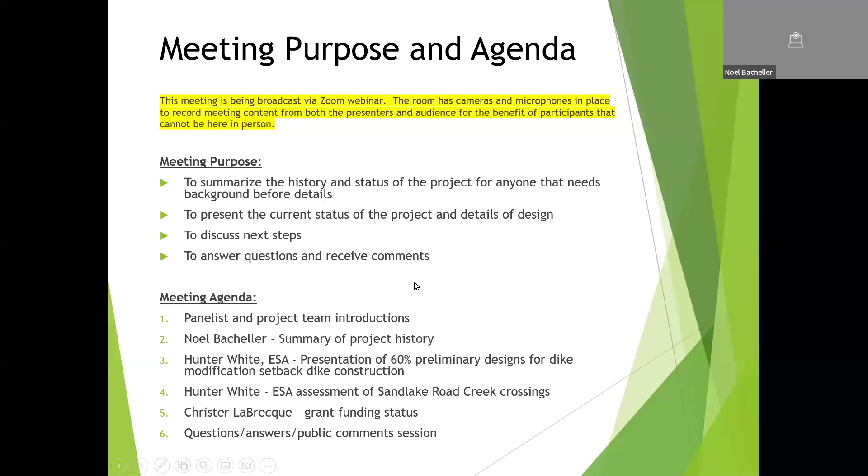Okay. All right, sorry everyone, mandatory technical difficulties, I never get through one of these meetings without them. I don't see any volume control. Oh wait, I know, it's over here on the wall. All microphones are at maximum now, hopefully that works.

Okay, to launch into the history and background now, I'll set the stage with the location. I'm sure everyone here in the room is familiar with the property, and sorry to go over this background again for those who've been to many of our past meetings, but there may be people on the webinar who haven't heard the backstory. The red boundary on the map is the park boundary. This black line is the 1930s era existing dike, Beltz Dike, which has a tide gate right here.

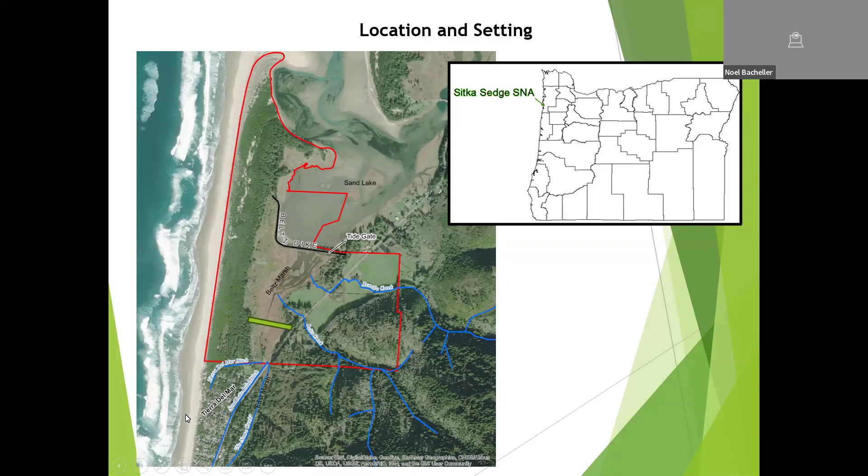There are three main streams that enter the marsh behind that dike. Reneke Creek is the northernmost, then we have Beltz Creek, and then No Name Creek—that's not its real name, but that's what we've been calling it for this project. No Name Creek flows through what we're calling East Marsh, again not a proper name. Sand Lake Road Ditch is here, and the Tierra del Mar Ditch. Tierra del Mar, the community, is here just to the south of the state park boundary.

And the purpose and need for this project: as many of you are aware, this is a very old dike. It's from the 1930s, not very tall, and has one undersized tide gate, a 4x4 box culvert.

The flap on that tide gate has no planks on it anymore, so water blasts through this thing unimpeded. The water velocity running through there is like a fire hose, just really high velocity, causing a lot of eddying and erosion.

The current box culvert, being only a 4x4 opening to drain an area of more than 70 acres of marsh habitat, is dramatically undersized. I like to describe this as something like an hourglass. This very small hole through the dike is very resistant to flow in either direction, so it takes a long time for water to come in, but it also takes a very long time for that water to go back out again. That'll be demonstrated in a video simulation here a couple slides ahead.

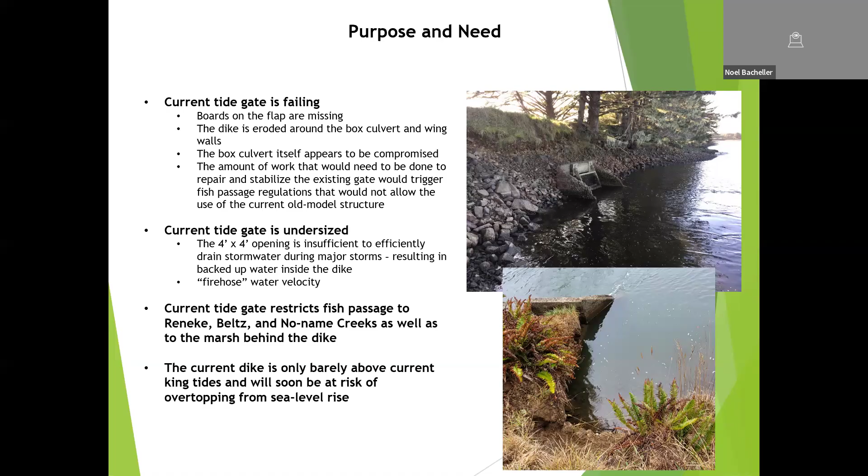So what have we done so far, and what's the timeline? This project has been investigated since about September of 2014, when State Parks acquired this property, and there have been many twists and turns. We did a bunch of analyses of biology, recreation, cultural resources, aesthetic resources, recreational usage, et cetera, up until about 2017 with the publication of the master plan. Then we really understood that this dike situation was a really big thing.

We had to do a lot more analysis of hydrology, surface water and groundwater, and embarked on several years of very detailed hydrological analysis, including the park and Tierra del Mar to the south. In 2019, when those studies were completed, a tech team convened to review the alternatives on the table and compare and contrast the pros and cons of each.

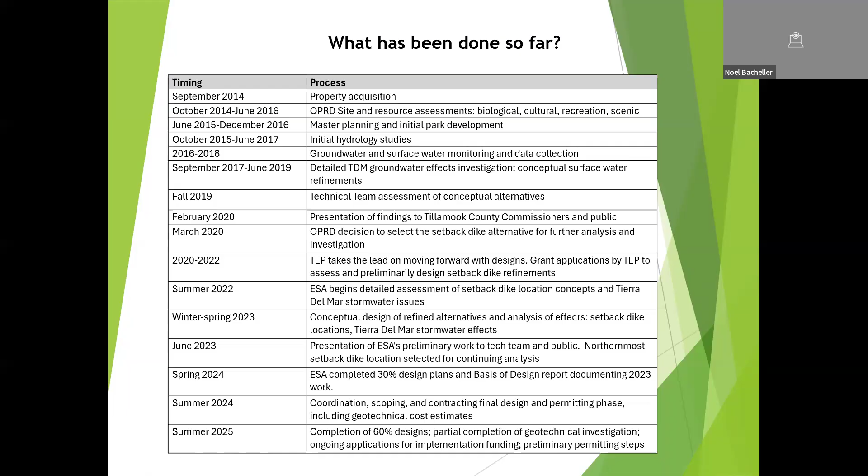In 2020, this was presented to Tillamook County Commissioners, the State Parks Commission, and State Parks leadership, and eventually we landed on a setback dike as the preferred alternative—the one that seemed to hit the majority of the goals for the property and for stewardship of both our relationship with neighbors and the property as a whole. We joined up with Tillamook Estuaries Partnership in 2020, and then ESA began working on the analysis of the setback dike in 2022, culminating in where we are today at 60% design.

Over the period of review, we've had at least 20 stakeholder meetings—it's getting hard to track the number over all these years, but maybe 23, 24 meetings. We've had news releases, and we have a website that holds all the archives for this project, including the hydrological studies from 2017, 2018, 2019, tech team results, et cetera.

We have an email list to which I'm sure many or most of you have subscribed. And we have had meetings with adjacent landowners and ongoing communication and collaboration with the Tierra del Mar Community Association and interested landowners. So what are the alternatives that we've assessed over the years?

Dike breach is something that's also a bookend. It doesn't meet our project goals, but it's there as a reference condition.

The two action alternatives that have really been analyzed over the years are replacing the existing tide gate with a modern muted tidal regulator system, and we analyzed different closure settings. I'll get into that in a future slide.

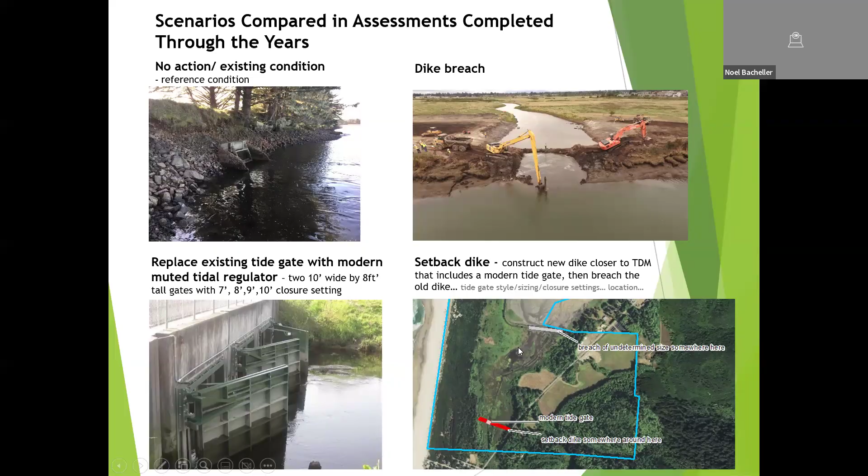This slide is just really to demonstrate that we went through a lot of analysis over the years to show what the effects would be with all of these different alternatives. So in the upper left here, we see the existing condition. This is what we see now.

And then we tested a 7-foot tide gate closure in a modern tide gate in the existing dike, 8 foot, 9 foot, 10 foot. We looked at the reference condition, which you could call a breach, or maybe before the 1930s. This would be the historic condition that existed here before the dike was ever built. And then the setback dike, which is our preferred and current alternative that we're pursuing.

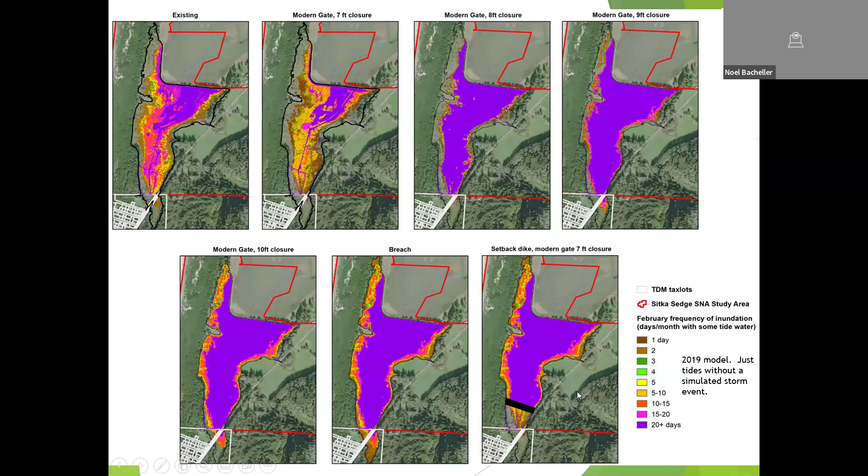That's the alternative that is the least impactful to, and beneficial for, Tierra del Mar.

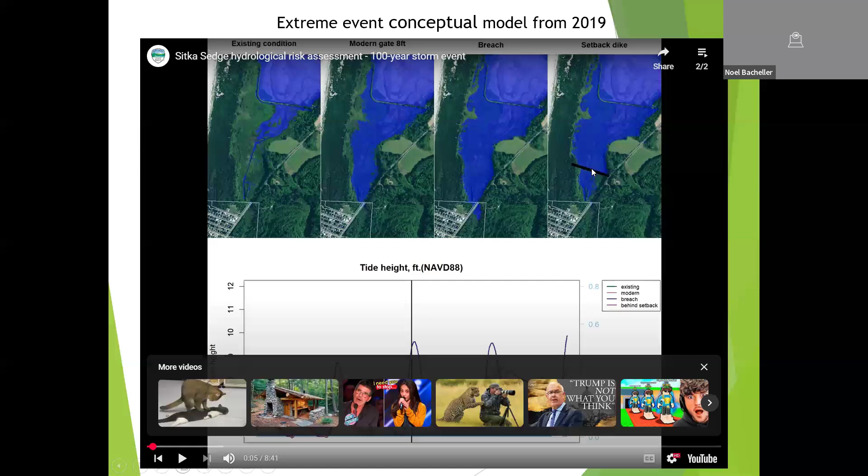The graph down at the bottom shows the height of surface water under each of these areas. The existing dike is the green line, the breach is the tallest one, the modern tide gate in the existing dike is an orange color, and the setback dike is more of a brown color. The blue is a rainfall event, and these tides are about 10 feet - big tides, king tides.

So what we do here is we just allow this to run. The line through the middle of the video is showing the point in time represented in the snapshots above. The point to notice here is that the existing condition drains out very slowly compared to all of the other alternatives.

This video takes a while, so I'm going to move it forward into this significant storm event - not a 100-year event, but a significant one. You'll see the tides come in under all scenarios, and under the existing condition with this amount of rainfall, it essentially never goes out. It stays in for tide cycle after tide cycle, while the other alternatives all drain out really quickly.

Now I'll move it ahead to a real gully washer storm - this is a 100-year storm event.

Off the charts rainfall with the highest tide we've ever observed, about a 12-foot tide. What we see here is what you'd expect from the previous segment with a lesser tide: the tide comes in and stays for days under the existing condition, whereas it drains out quickly under the other alternatives.

Of note here, the setback dike outperforms the modern tide gate with an 8-foot closure setting. It drains out more quickly because not as much tide water is stored or allowed to get in close to Tierra del Mar. These private properties, these tax lots, receive sustained inundation under the existing condition, but they're all drained out efficiently under either the modern tide gate scenario or the setback dike scenario. The setback dike performs the best.

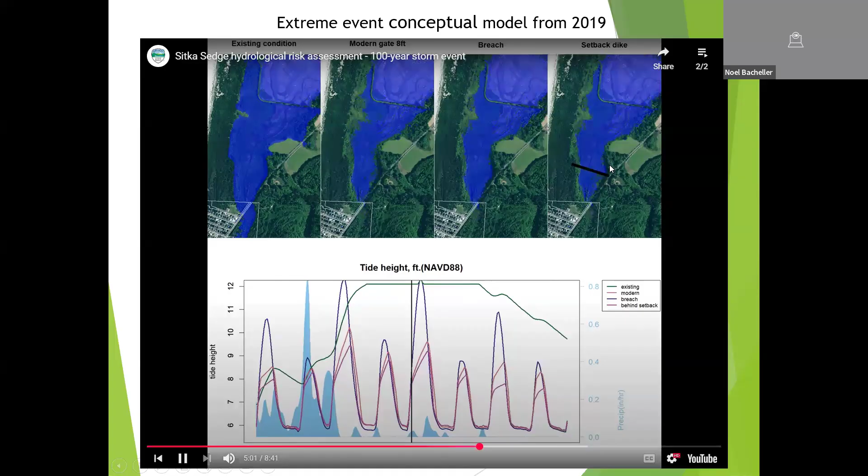So OPRD, the Oregon Parks and Recreation Department, put together some sideboards - five guiding principles for selecting an alternative. The first is that the design should result in virtually no increase in tidewater, stormwater, or elevated groundwater on private properties in Tierra del Mar.

Number two is the design should result in meaningful improvements to estuary and fish habitats in the area inside the existing dike. The design should restore fish passage to the mouths of Reneke and Beltz Creeks.

Recreation access should continue. We still want people to get into the marsh, to get across the marsh, and be able to get out to the beach and out to the dunes and experience the park.

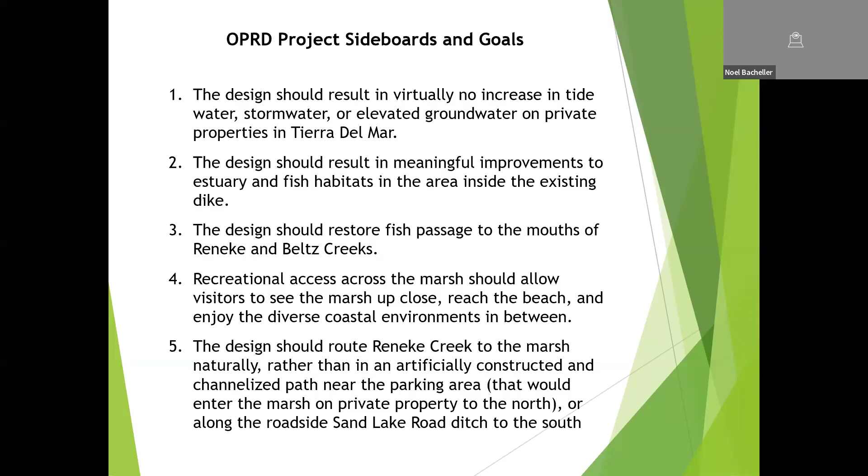And the design should route Reneke Creek to the marsh in a natural channel rather than, like right now, running in a roadside ditch. So we want a natural channel for Reneke Creek that has proper fish passage and fish habitat.

So, pros and cons for each alternative that led to the eventual decision. The no action alternative has no pros - it's the worst case scenario, so I'm not even going to talk about that one. It doesn't meet OPRD's stated goals at all. The dike breach scenario also doesn't meet OPRD's stated goals because it increases tide water on private properties.

It does have the highest estuarine restoration value - more estuarine restoration, more fish passage, and more fish habitat there, but the cons outweigh the pros, so it's out. The modern tide gates in the existing dike are sort of middle of the road. It has some good effects on habitat, but not as good as the setback dike, and it's also not resilient to sea level rise.

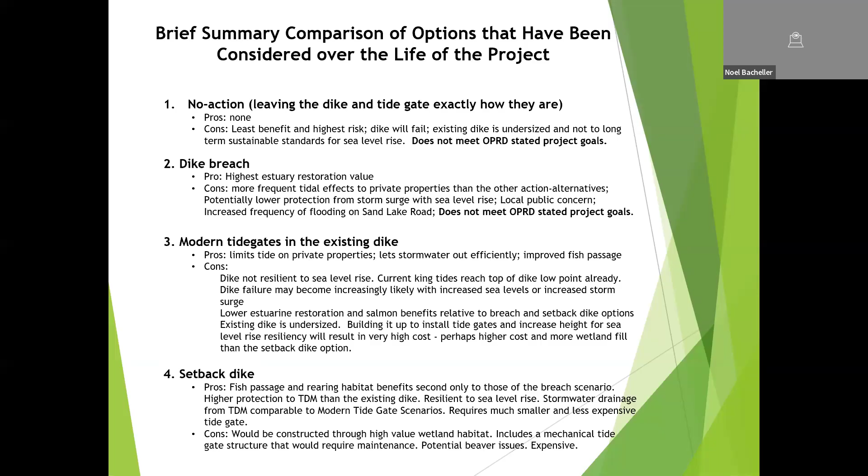The existing dike, if you slap a new tide gate in there, yeah, it'll do what it's meant to do until sea level rise overtops it. So the taller, stronger setback dike is the alternative that's the sweet spot between providing habitat, fish passage, and protection.

In 2020, as I said before, we presented all of this analysis to the Tillamook County Commissioners, the public, the Oregon Parks and Recreation Commission, and OPRD leadership. The decision was made to pursue the setback dike as the preferred alternative. We released a decision memorandum and a frequently asked question document, which is still on our website, about that decision.

And in, I think it was June of 2020, we received a letter of support for that from the Tierra del Mar Community Association.

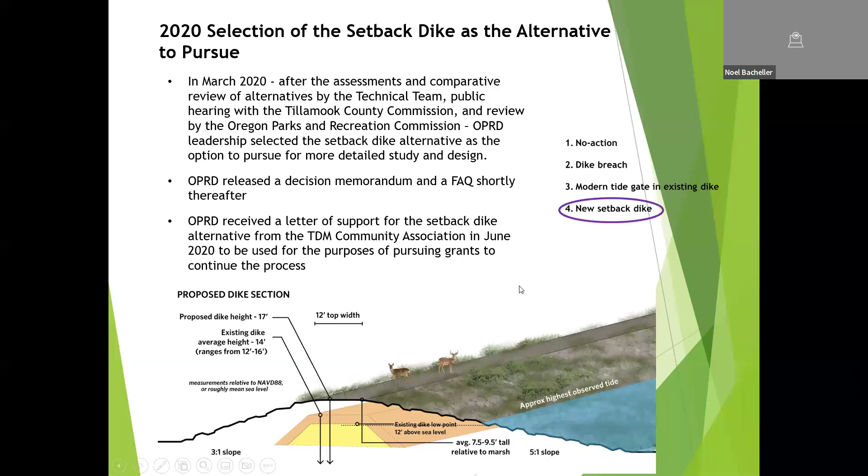Further study of the setback dike took a bit of a hiatus in 2020 because of COVID and loss of funding. But during that time we forged a strong relationship with Tillamook Estuaries Partnership, who are able to apply for grants that we can't, and have a strong demonstrated ability to work on this type of project, with strong experience in tidal restoration.

So they were able to get a grant in 2022 to hire Environmental Science Associates to continue the design of the setback dike and figure out exactly where to put it and what the design criteria would be.

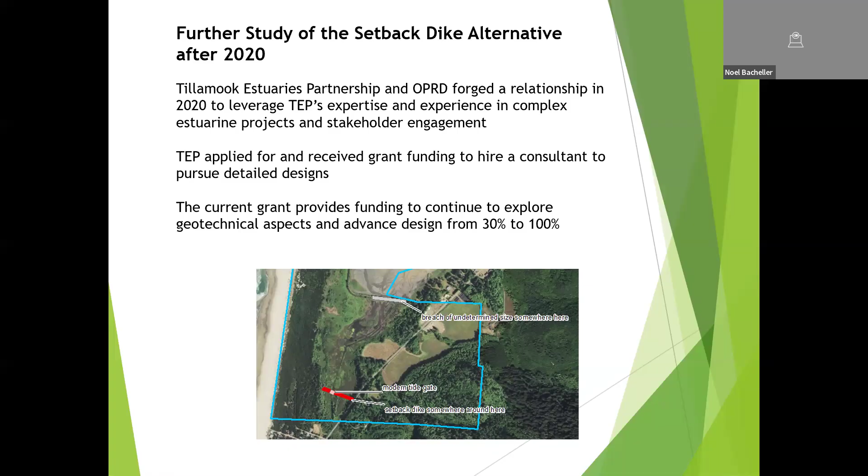The scope of work from 2022 was to zero in on exactly where that setback dike should be placed, and also to figure out where to breach the existing dike - should it be one breach, multiple breaches, or total dike removal? Just investigating all the options there.

And what comes along with that is, how do you continue to provide recreational access? Do you put bridges across any openings in the existing dike, or do you use something like a boardwalk?

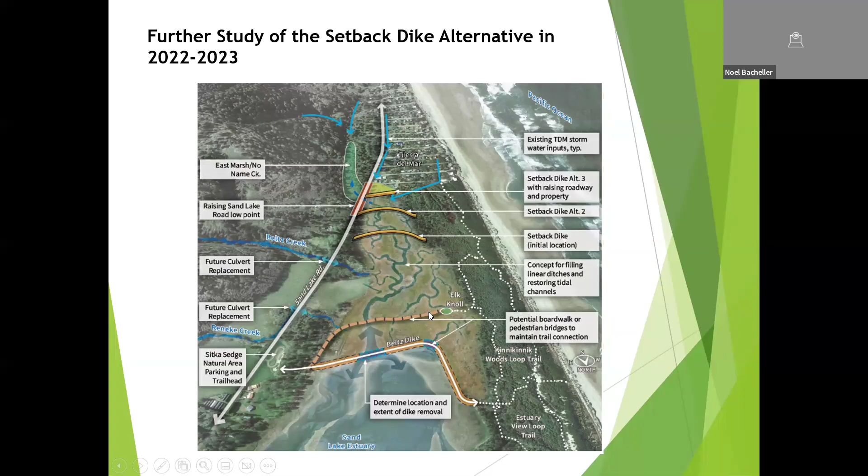So all of these things were analyzed in 2022, 2023. Also, a side study done by ESA at that time looked at surface water accumulation in Tierra del Mar, examining the topography out there and what is inhibiting proper drainage of the community.

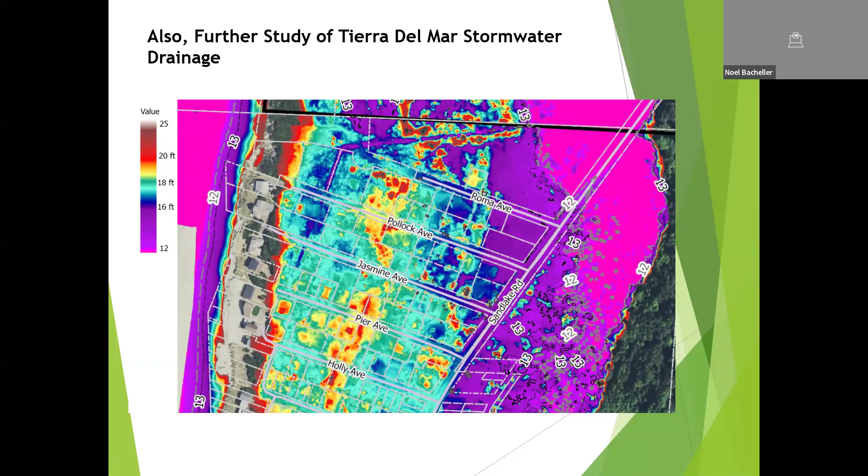So the early stage of figuring out where to put the setback dike is what I've been calling tapping on the wall to find the stud. You don't know right offhand exactly where to put this thing without a little trial—you have to ask, what if we put it here? What would the effects be? What we're looking for is minimizing the footprint of the dike so we're doing less damage to the marsh.

We also need enough storage capacity for stormwater behind that dike during periods when the tide gates on the setback dike would be closed. During high tide, the tide gate will be closed, and whatever stormwater is flowing down No Name Creek, Sand Lake Road, and Tierra del Mar Ditch will have to be stored until the tide gate can open again when the tide goes out. So the dike has to be far enough north to have enough land to store the water.

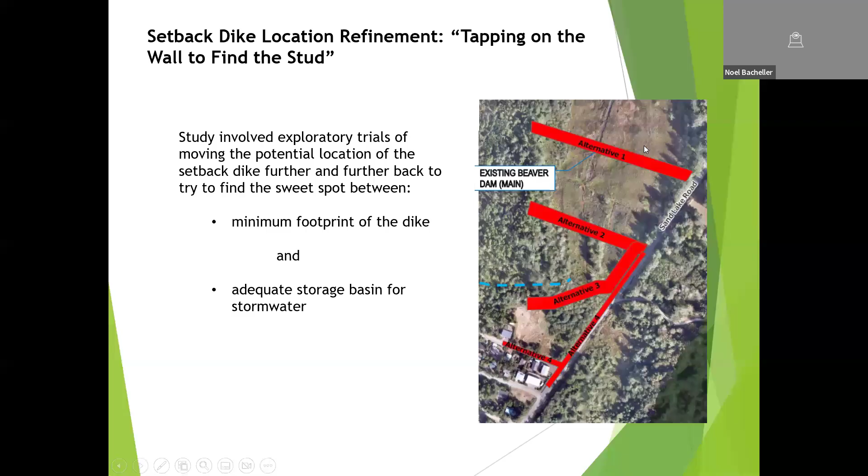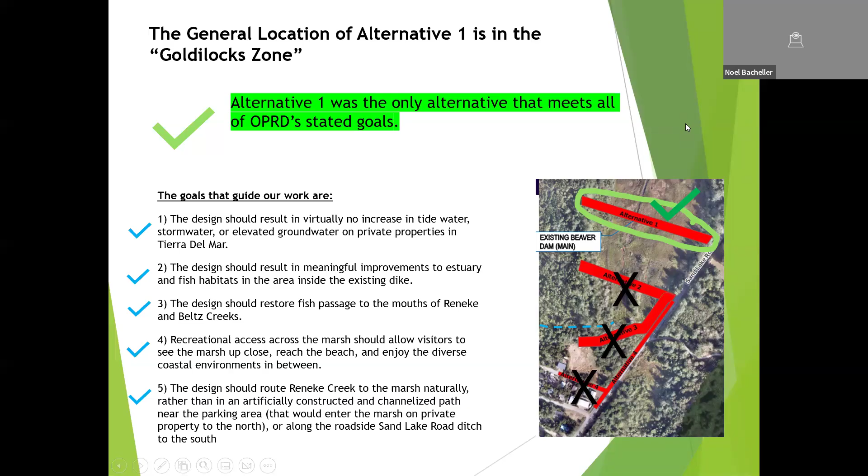We also don't want to put it so far north that it blocks access to Beltz Creek and dissects the habitat. That analysis determined that alternative one, the northernmost position of the setback dike—roughly corresponding to what I showed in those videos earlier—was the only alternative that met all of OPRD's stated goals and provided the needed stormwater storage capacity. It provides it well, and water would be decreased on the boundary of Sitka Sedge, so private properties nearby would experience less water than they currently do under this scenario.

So what about habitat? What does this do? We're going to be plunking down this setback dike in the middle of the marsh—1.5 acres of fill. That impact is offset by restoring 70 acres in front of the dike to natural estuarine habitat, with good estuarine vegetation, function, and perfect fish habitat. It also completely restores fish passage to Reneke and Beltz Creeks, fully unimpeded. So there's a trade-off there.

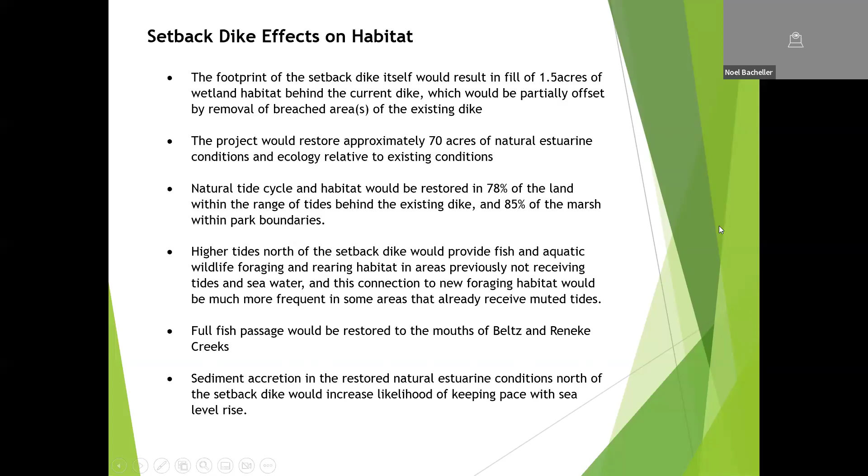The sediment accretion is the last thing I wanted to mention. We did a little analysis of what happens when you don't allow enough sediment to come in from the Sand Lake estuary. A theory that seems borne out by evidence in other Oregon estuaries is that if you allow natural tidal flow into a marsh, the sediment and muck that drops out at slack tide builds up in layers over time. In a sea level rise situation, that can allow the marsh to keep pace with rising seas. If you don't allow enough sediment in, the marsh could become less vegetated over time or turn into open water habitat. We don't have real analysis of this, but it's borne out by other reference sites around the state, so it's something to think about.

In terms of effects on habitat, the inset photo on the left shows the existing habitat in 2016 when we did the mapping. The light green is freshwater marsh and the pink is high salt marsh. Those get pushed out toward the edges under the setback dike scenario, and we see a dramatic increase in low salt marsh.

Low salt marsh is a very important juvenile rearing habitat for salmon, so this is something we'd be interested in for fish habitat purposes. South of the setback dike, there's no tidal influence in this yellow area, resulting in a net drying effect to the area behind the setback dike.

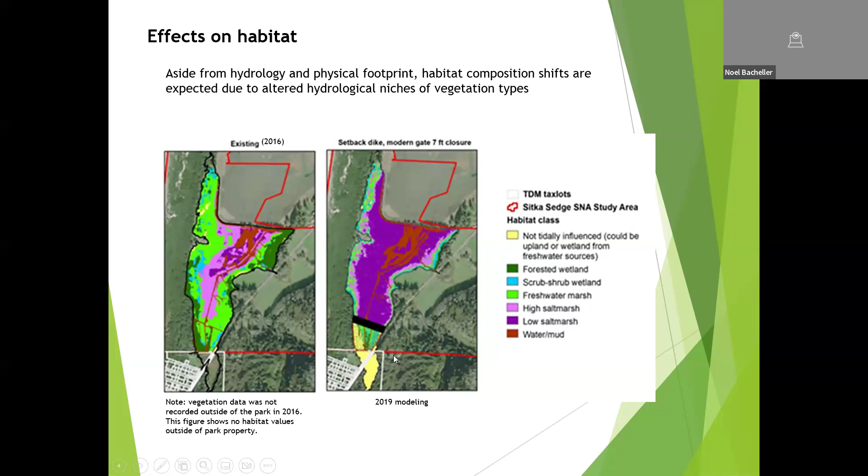Effects on private property are super important to OPRD and to the group over the years as we've engaged with stakeholders. The summary is generally that the setback dike improves the situation with surface water around here at Del Mar relative to either the existing condition or the pre-dike conditions.

As you can see in this image at the bottom, which shows an average February, this indicates the number of days you would expect to see tidal surface water on any particular spot. There's tidal surface water on private properties under these scenarios in an average February, but not under the setback dike scenario.

This effect would also extend to protecting vehicle passage along Sand Lake Road, which overtops right in this vicinity. In a pre-dike situation or the existing condition, water can flow over that road, but under a setback dike scenario, that road is protected.

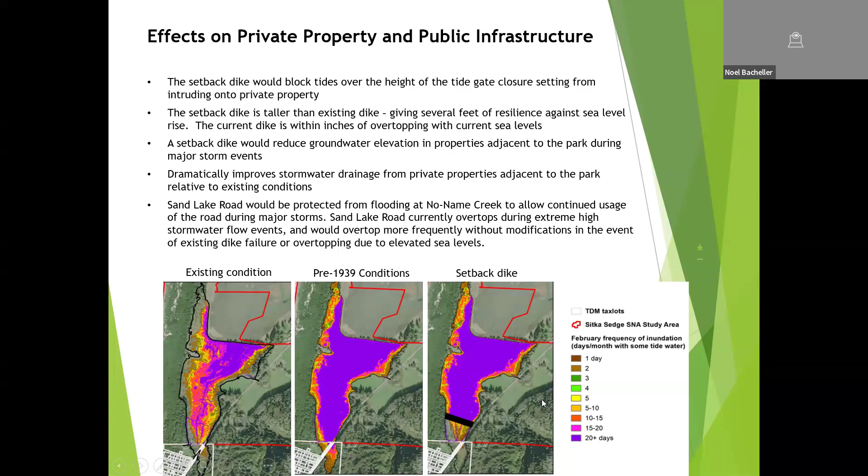So with that summary of where we've been, here are the next steps. A geotechnical assessment is coming very soon inside the marsh, within a matter of weeks, I believe, and that will allow continued design from the current stage of 60% to 100%. 100% designs are expected in the spring of 2026, so something like 6 to 8 months from now.

Permit applications are already underway for implementation. We've been talking with permit agents and regulators, and those permits are moving along. They'll be in process for a number of months to come.

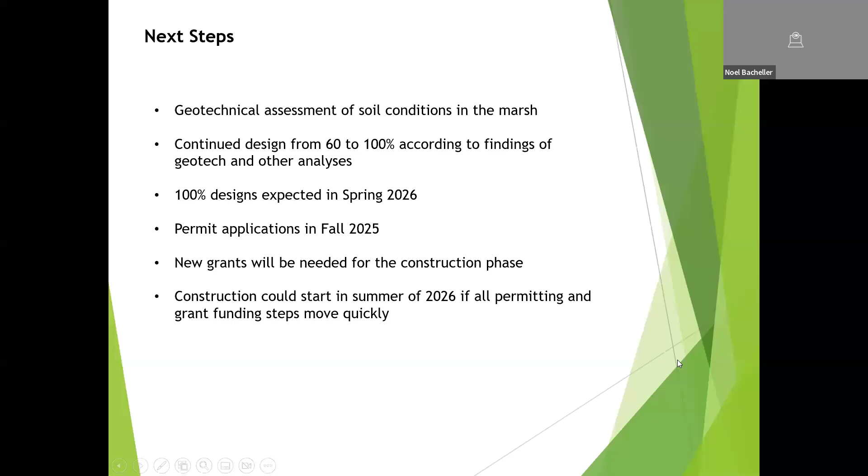We'll need new grants, and Krista will talk a little bit about the implementation money situation, but we will need that to be able to move forward. If everything goes smoothly, we could be constructing the setback dike in the summer of 2026 — within 9 months there could be setbacks depending on permits and funding, et cetera, but if all goes according to plan, that's where we would be.

And with that, I've finished that summary, and I'll hand it over to Hunter, who's going to give us the 60% details.

Yeah. Hunter, you want to introduce yourself too?

Hi everybody, good to see many of you again. My name is Hunter White. I'm a civil and water resources engineer with ESA, Environmental Science Associates. I've been working on this project for a number of years now, dating back to 2019 with the hydrologic study and all the steps in between as we've been moving towards design and ultimately towards construction.

I'll say that I represent a whole team of engineers, scientists, landscape architects, biologists, permitting staff, as well as subconsultants. David Evans and Associates are structural and roadway engineers, and we have a geotechnical engineer with Shannon and Wilson. So really a large team of professionals working on this project and all the details involved.

So now, Noel gave a great background of how we got to this point, and at this point in the process we are developing construction documents. What I'll be showing you here today is a lot of views from our 60% design drawings. These are set up mainly for construction drawings, and some of the labels are a little hard to read, but I'll point out what we're looking at.

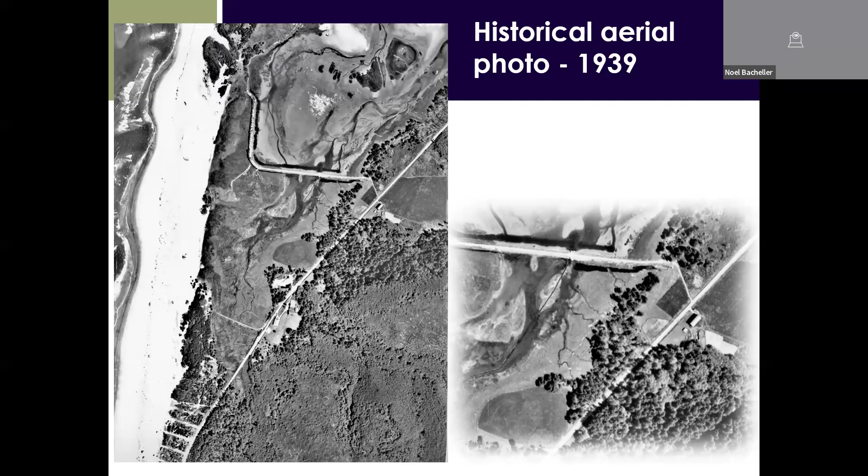Again, with all of this, we're trying, to the extent feasible, to recreate the conditions before these modifications occurred of the diking and draining of the land. This 1939 aerial is as far back as we can look with air photos. Even in 1939, the Beltz Dike was already constructed. You'll start to see some of the tidal channels being filled in and some of the ditching that occurred. On the right there, zooming in on that Reneke Creek area, you can see sinuous tidal channels that would have existed and likely carried a good portion of Reneke Creek's flow to the marsh and to Sand Lake.

Here zooming in on the dike, looking at where we will plan to breach and put in the new pedestrian bridge. The yellow arrow shows where the existing drainage structure is, the 4 foot by 4 foot box culvert with a tide gate that's no longer functional, or is completely missing now. These three arrows in the middle are where we'd see the largest amount of water moving through this area, connecting into the large channel forms that were present in 1939 and actually still exist today.

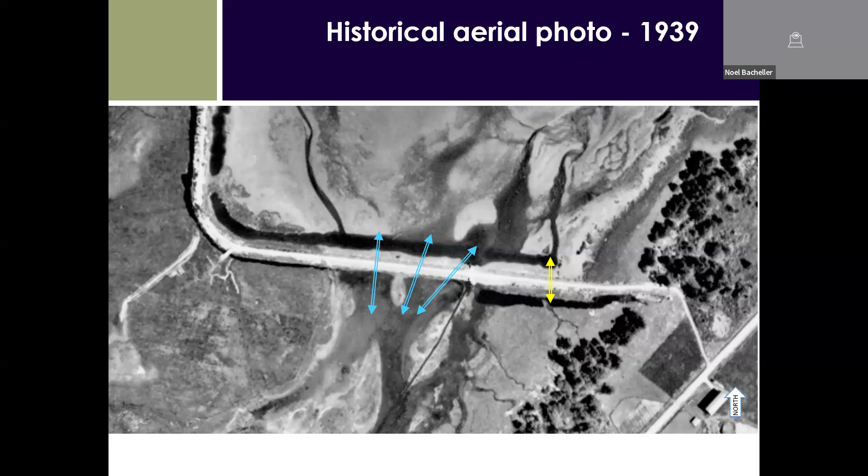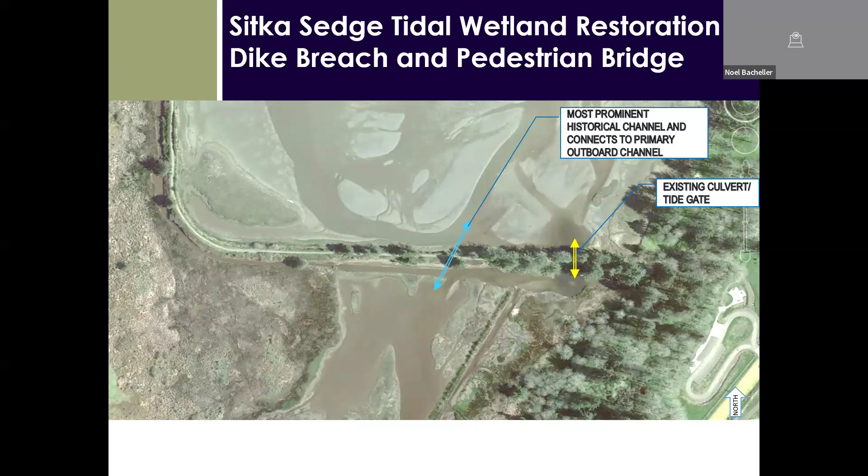Here's a more recent air photo. Again the yellow arrow shows where the existing culvert and tide gate are, and this blue arrow is where we've decided it makes the most sense to breach, which connects into the most prominent channels, both in that previous air photo and today. If you stand in this spot, especially at low tide, and look out in either direction, you can see this channel that we're trying to reconnect.

In addition to reconnecting the flow path of these main, most prominent channels, we're also filling the linear drainage ditches that are at the base of the existing dike. The dike is going to remain for the most part—the Beltz Dike Trail is there. We will be making a few improvements to the trail itself and raising up a low point.

On the right side, you can see where the existing culvert is that we'll be removing, then reconstructing the embankment there. There's a lot of erosion that's occurred around that existing box culvert, so as we remove that structure, we'll reconstruct the embankment so it maintains access long into the future.

We're also redirecting some of the flows—rather than having water flowing parallel to the dike in these drainage ditches and then taking a hard right or perpendicular turn through the opening, we're lining up the flows to more effectively go through the new bridge opening and reduce erosion potential. We're also adding large wood structures, which have a dual purpose: stabilizing the banks in those locations as well as providing fish habitat.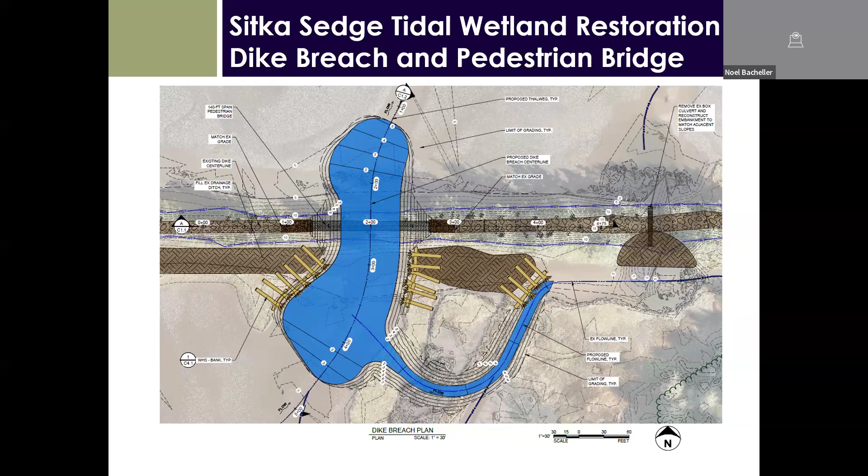So this is zooming in on the breach itself, showing a plan and profile view. This is a 140-foot wide breach and channel being constructed, with a prefabricated 140-foot span pedestrian bridge going over it. We're working with David Evans structural engineers on this.

They're designing the bridge abutments, and we're planning for a prefabricated bridge system to be installed. There's upcoming geotechnical investigation work on the horizon, but we've also done a lot of geotechnical investigations and engineering already, particularly at this pedestrian bridge, at the Reneke Creek Bridge, and the location where the setback dike will tie into Sand Lake Road. This work is informing the 60% design, and we have a bit more coming up specifically in the marsh at the proposed setback dike and tide gate structure.

I won't get into a lot of detail on how we sized this opening, though happy to if folks are interested. Essentially we wanted to make the opening large enough that it passes water efficiently and keeps velocities low, so it won't tend to erode, minimizing the stabilization, armoring, or riprap needed beneath the bridge. This 140-foot span was a good middle ground, maximizing the bridge size economically while providing an opening large enough to resist erosion and keep velocities low for fish swimming through.

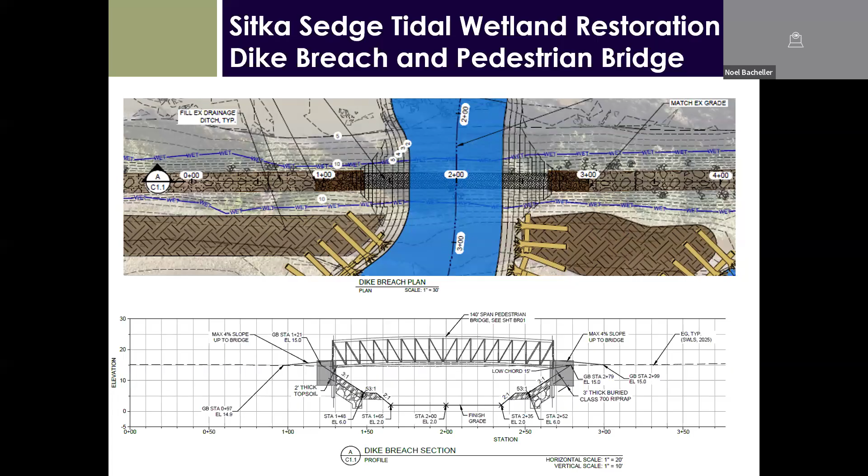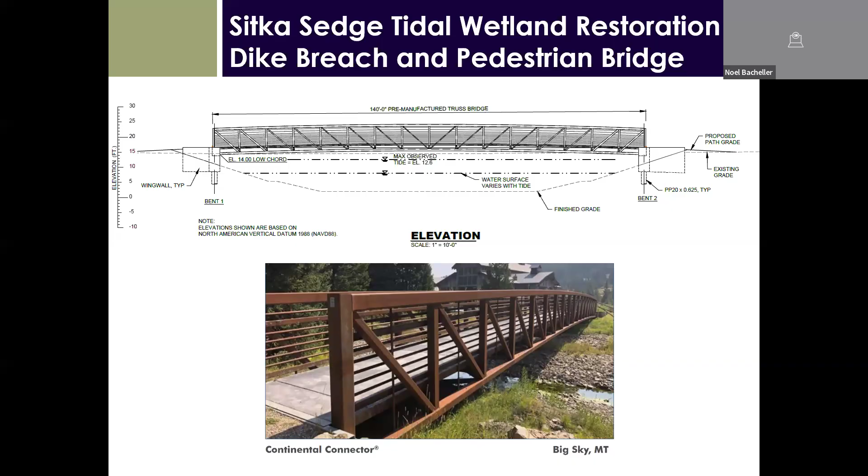This is a view of an example bridge similar to what we might end up with at Sitka Sedge. It's a Continental Connector bridge from Contech, and the view at top is actually from the 60% design drawings in David Evans' plans.

Here's another similar example, located in the Lewis and Clark National Historical Park near Warrenton and Astoria on the Lewis and Clark River. This one crosses a smaller creek called Colewort Creek, and it's actually around that same span length. With larger spans, the bridge structure has to get bigger and taller — you can see the side rails coming up pretty high, which is required to achieve that span.

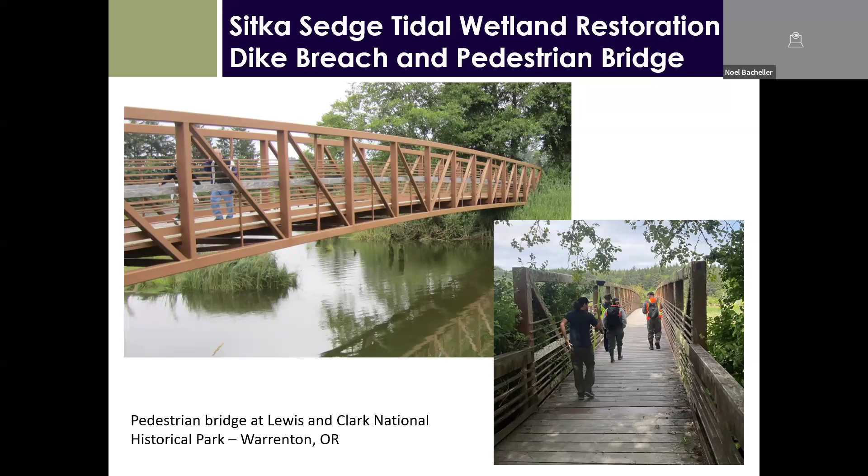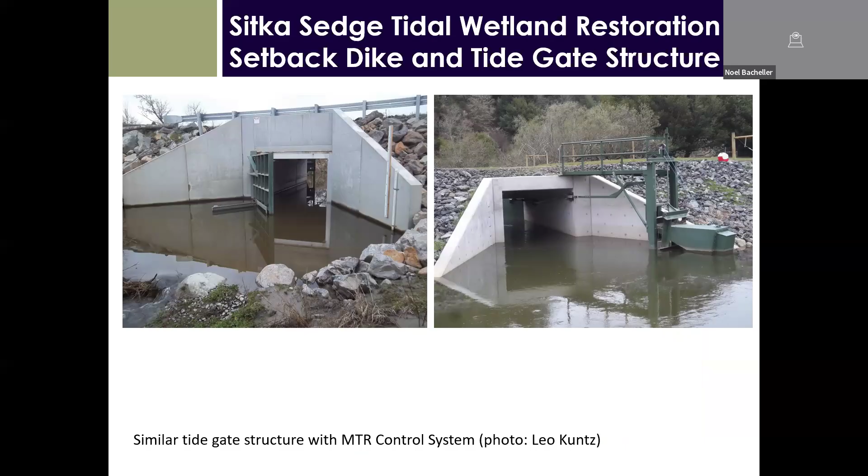On the left here is the front side of the structure with the tide gate. It'll be a side-hinged tide gate, 8 feet tall by 10 feet wide, so a pretty large gate. On the interior side, there's a mechanical float and counterweight system.

This next slide will quickly run through how this type of system functions for folks who aren't familiar with it. At the top, when the water is low, the float on the right side is down and it props the gate open, so the gate is open during low water moments. As water rises, in the middle you can see water has moved up a little bit, not quite flooding out the pasture, which is often what these systems are intended for. In our case it's very similar.

The beaver dam is effectively at this 8-foot elevation, and the marsh plain behind it is right about that 8-foot elevation. So our system will function so that we let water in until it almost reaches that pasture elevation and almost reaches the top of the beaver dam. Then the mechanical system will allow the gate to close. As the outboard water level rises, the area behind or south of the setback dike will stay low. That would be normal tidal operations.

When there's a big storm coming down the system, you'll start with this condition at the bottom. As water fills from rainfall and fills the basin behind the setback dike, that area behind it will rise. Through the modeling we've conducted, we've located the setback dike so there's plenty of room, plenty of storage volume, for that water level to rise before it would overtop Sand Lake Road or reach the private properties in Tierra del Mar—and again, generate lower water levels than are experienced under existing conditions.

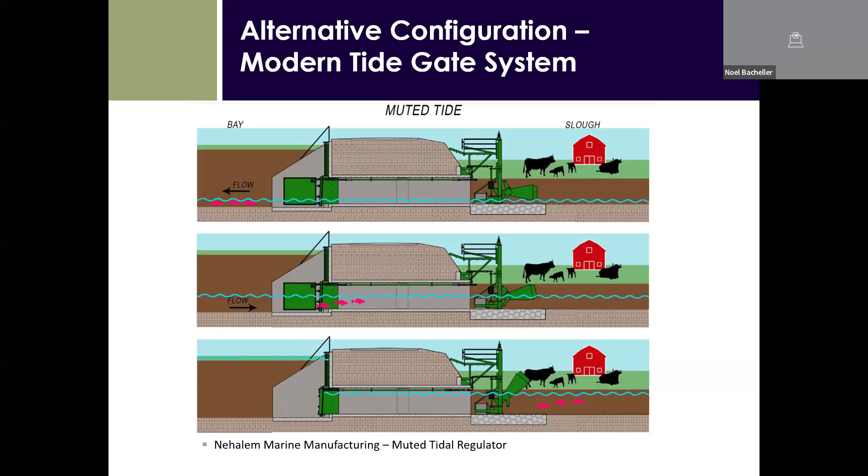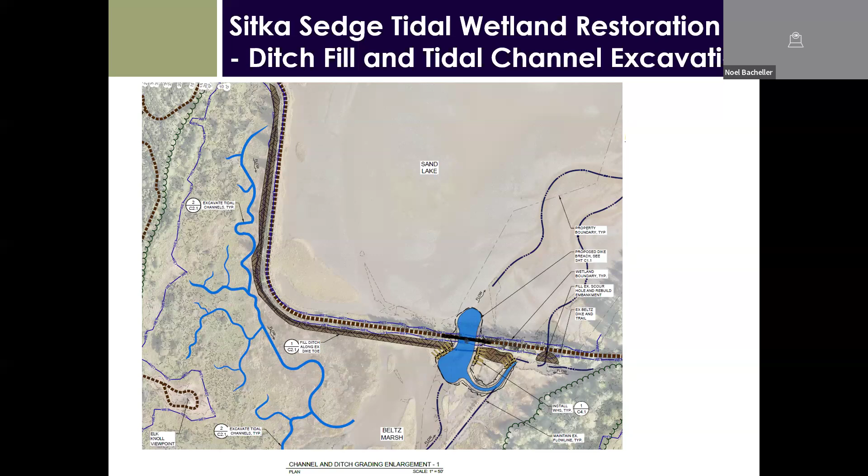In addition, some of the other habitat enhancements we're proposing are, as I mentioned, filling some of these linear drainage ditches that were excavated for the sole purpose of draining the land fast. For the area we're reconnecting, we really want to maximize the habitat value. The blue squiggly lines you see here are trying to mimic what would have been here before, matching the plan form, the sinuosity, and the sizing of tidal channels that would occupy this area. As we move south in the marsh, interacting with the setback dike, there's a whole network of proposed channels we plan to excavate while filling the linear drainage ditches.

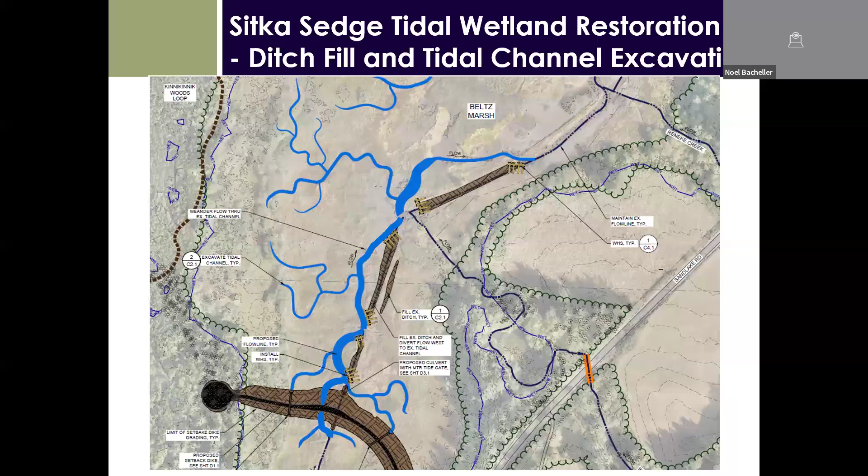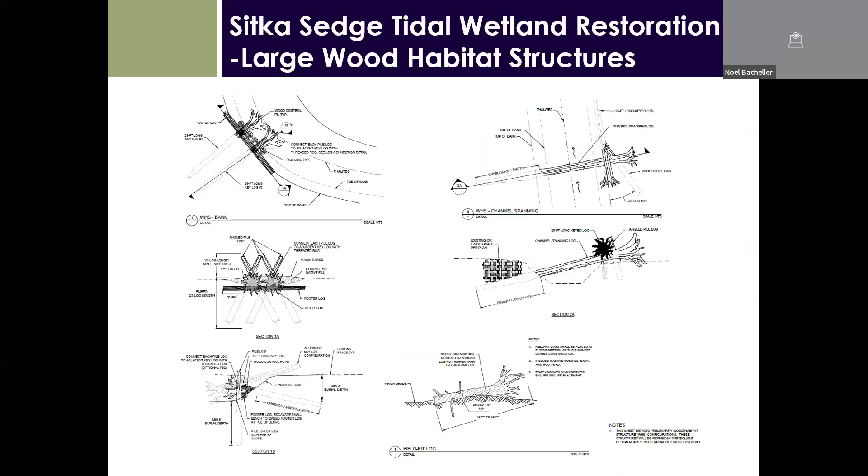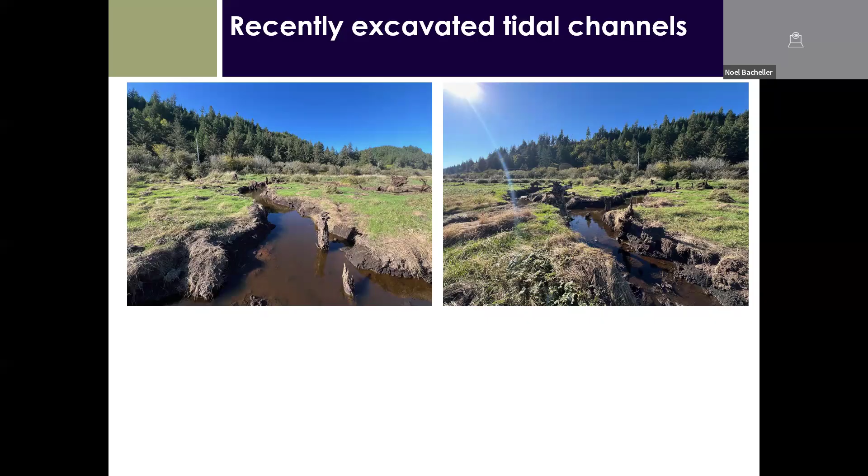Here are a few examples of wood structures from our plans and drawings, and here's a couple of examples from a project down near Florence, where these are newly excavated tidal channels. In fact, these channels were excavated just a few weeks ago, so you can see we do have to get equipment into the marsh to dig these channels, and it can be pretty impactful. But with specialized low ground pressure excavators, it can also be done with a pretty light touch. You can see the amount of vegetation retained along the edges, and some large wood logs in these channels as well.

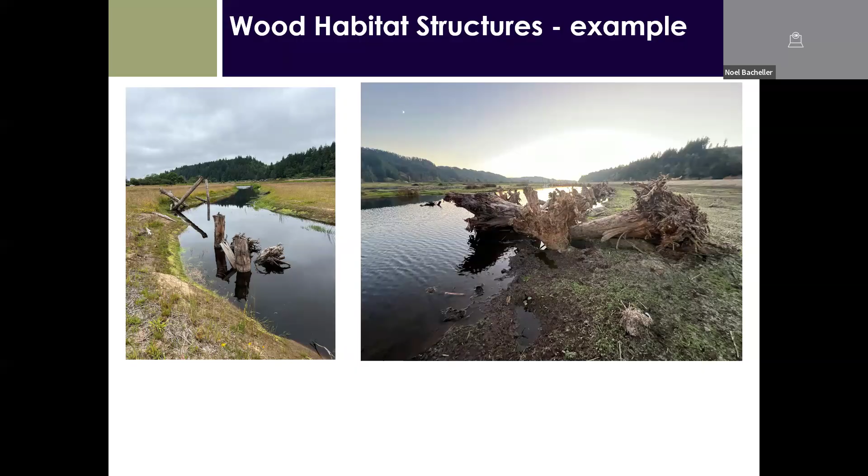So another big part of this project is not only providing fish passage into the marsh, which will provide better fish passage into the creeks coming in, but also to improve fish passage at Sand Lake Road, where each of these three creeks cross.

Reneke Creek is the top priority, again, because it is the largest stream. It has the highest potential for fish, and it is also the location where the roadway overtops a lot, making it the highest priority for Tillamook County Public Works from an infrastructure perspective as well.

Beltz and No Name Creek are still in the works. We're designing those to a 30% design level right now, but there's no additional funding at this moment to take those forward. Krister might talk a little bit about plans to bring those forward in the future, but right now the 60% design includes the Sitka Sedge project, as I've just described, as well as the Reneke Creek culvert replacement, and I'll get into that in a little bit more detail here.

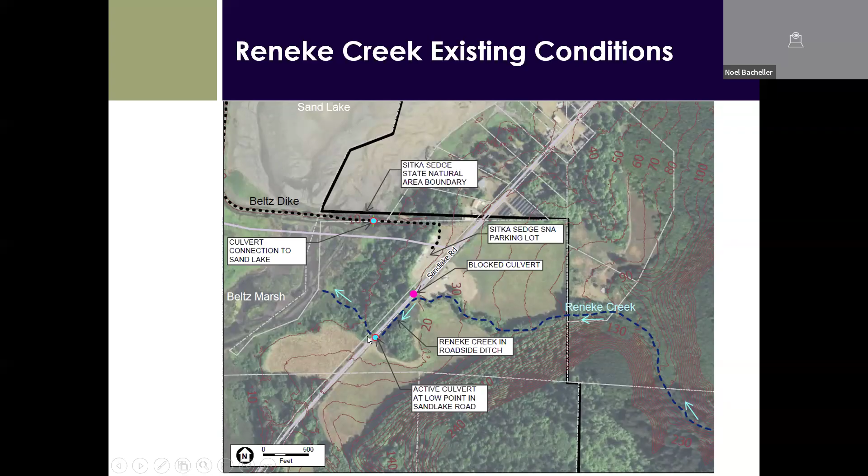A lot of what we've looked into is really trying to understand what's the best place to put a new bridge. And what we've gotten into here is a deeper analysis of the hydrology and the geomorphology of how sediment and water moves through the area.

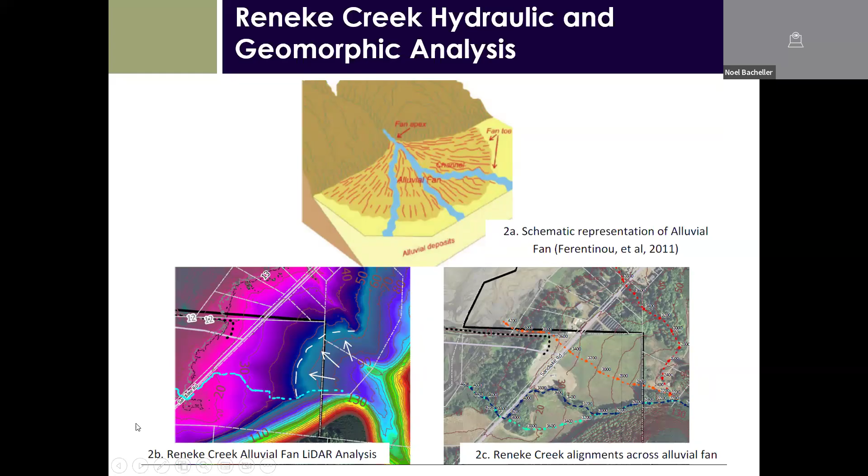So we can really see in the LiDAR that is what we have here at Reneke Creek. Effectively, through years of modifications, Reneke Creek has kind of been pushed off the side of its alluvial fan. It stays relatively steep through there, and now where it exits that area, it still flattens out and still drops a lot of sediment. That's the reason why the culverts block, the channels fill in, and it creates a lot of maintenance issues.

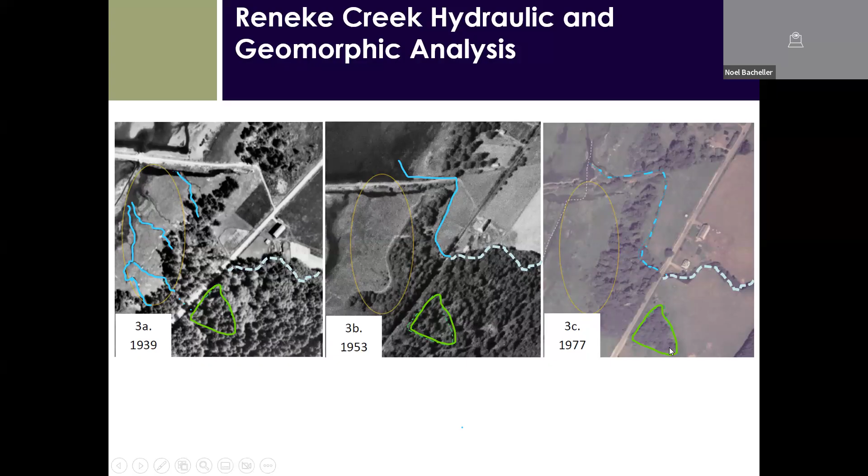And this small little green triangle here is this patch of forested wetland that still exists today. You'll see we're kind of playing on that in our design.

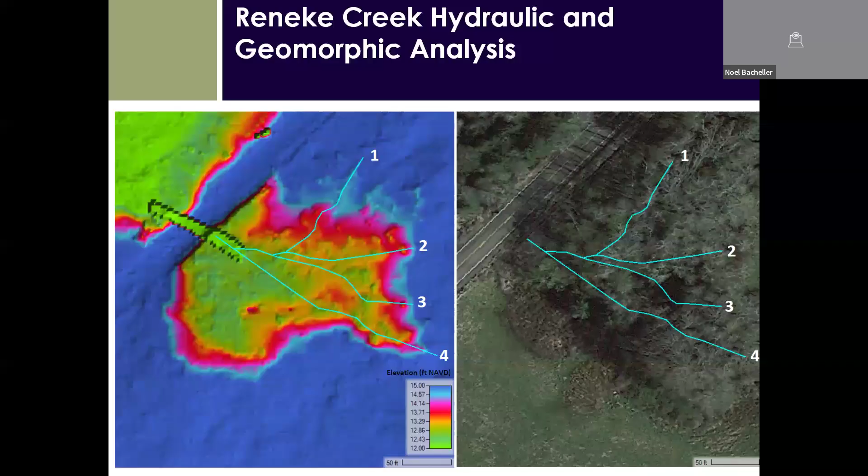So this is a view of our 60% design where we are planning to divert the creek across this floodplain area and reforest it as well. I'll give you a glimpse at the planting plan.

What you see here, we're planning to fill the ditch along Sand Lake Road, raising up the road and putting in a new bridge, and filling a portion of Reneke Creek's channel to keep it from going back into that roadside ditch. This allows it to flow across this portion of the alluvial fan, the floodplain, remeandering the creek in a more sinuous and natural form, and roughening up the floodplain to really try to recreate some of that forest floor structure that would have been there prior to clearing.

So we're putting in a lot of large wood, both in the channels and on the floodplain, again to just recreate that forest structure, and these are shown as berms here. So in addition to just excavating the channels, creating some berms, creating some roughness that will block water and slow water down, allow gravels to deposit, and provide a multi-threaded channel with side channels that, again, is more likely what existed prior to the conversion.

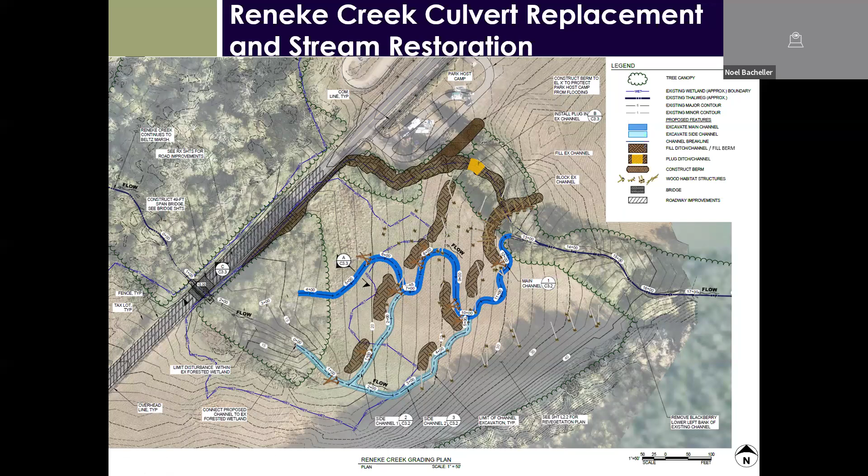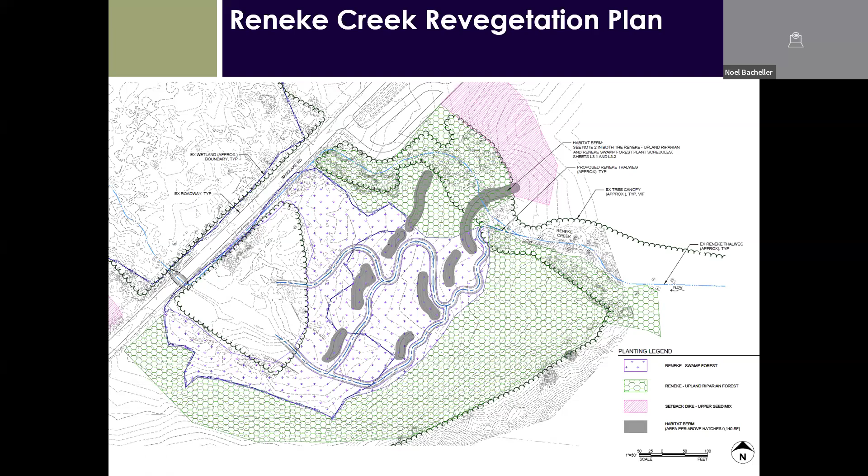This is a view of the revegetation plan, showing two different hatch or fill patterns. Within the wetland area, we're proposing swamp vegetation, a forested wetland. As we get out, this green honeycomb hatch pattern is riparian forest, trying to recreate what existed even as close back as the 1950s.

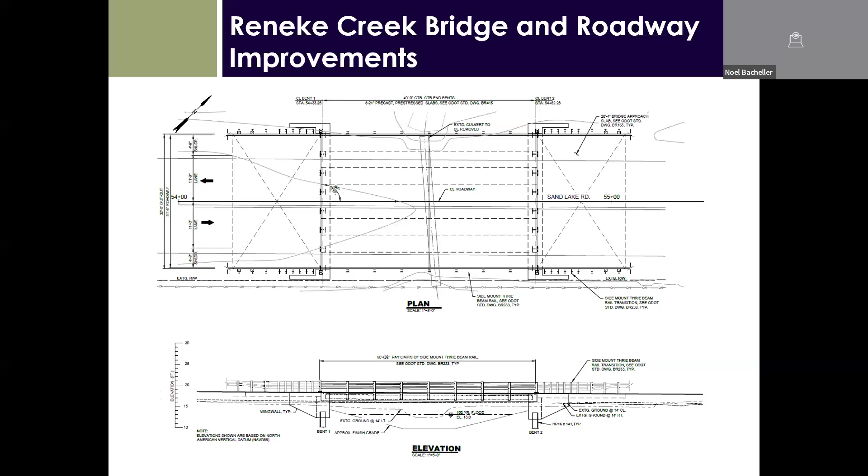These are a couple views from the structural engineer's plans for the new bridge, upsizing that small 2-foot diameter pipe to a 49-foot span bridge. That's a drastic change and improvement, sized big enough to convey the flows, handle gravel deposits, pass debris and wood, and be low maintenance for the county long into the future. We're also raising the road about 2 feet in that location for more clearance beneath the bridge so it won't overtop anymore, making it a more reliable route for traffic.

These are a couple views of the roadway design, just giving you a glimpse. Again, these are construction drawings you're getting a chance to look at. With that 2 feet of road raising, it requires us to raise about 650 feet of the roadway to raise up that low point.

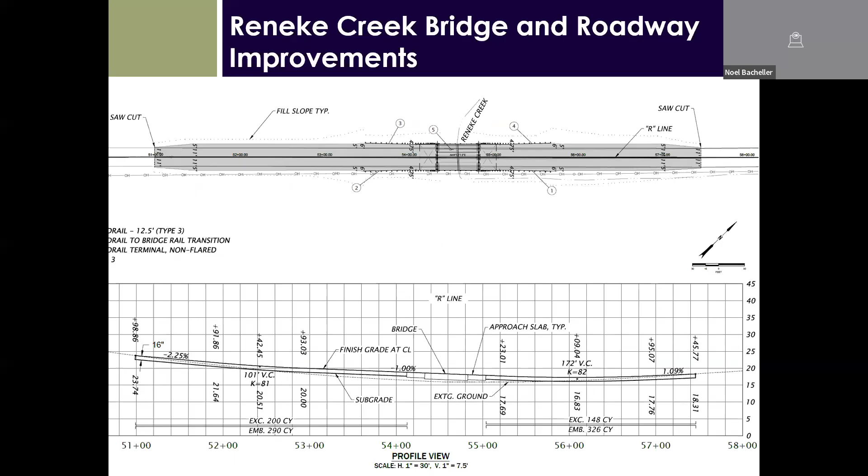And here we're back to just the overview of the site, happy to take any questions and discuss. I think we do have one slide though.

Maybe, I guess we're going to talk a little bit about construction costs. As we've advanced the design towards construction, TEP, Tillamook Estuaries Partnership, is raising money, seeking grant funding and doing a great job at it. There are good prospects for additional grant funds to come in. Right now, we're estimating the Sitka Sedge Tidal Wetland Restoration Project, with the pedestrian bridge, setback dike, dike breach, all the channel work, and all the construction logistics like traffic control, access, staging, and managing the water, at just approaching $10 million.

The Reneke Creek Bridge replacement and stream realignment work is about another $3 million estimated.

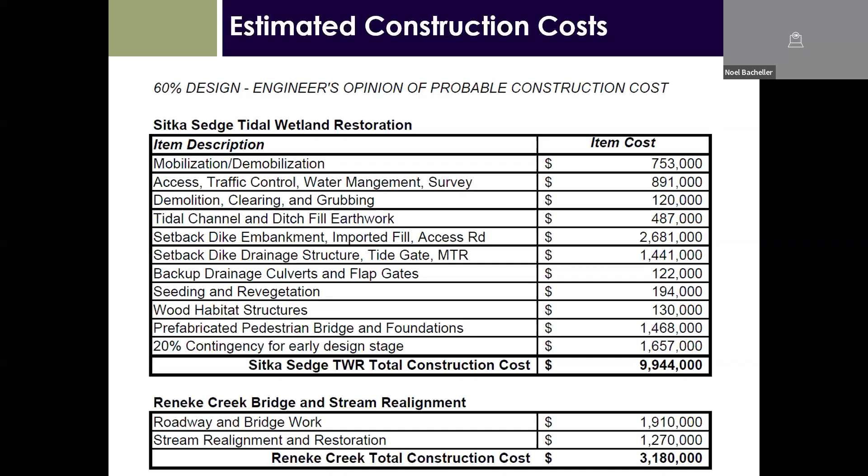So with that, I don't know if Christopher wants to mention any of these. This is a view of some of the fundraising that has already occurred and is underway.

Thanks, Hunter. Yeah, we've been pretty successful at raising money so far for this. I'm not gonna read through all of it, but we currently are announcing that we just received a $6 million grant through NOAA, which is going to pay for the bulk of the construction inside the estuary. We also have about $9.5 million pending from 3 other grant sources we're waiting to hear from: one is a Tillamook County grant, one is through the Wild Salmon Center, and one is another TEP NFWF grant.

So we've raised a lot of money for this project. This stuff is really expensive, construction costs have skyrocketed over the last 5-6 years. We're in a pretty good position financially for this project to happen, and with pending funds, we're feeling pretty good about it. So it's pretty exciting. Yeah, that's all I got.

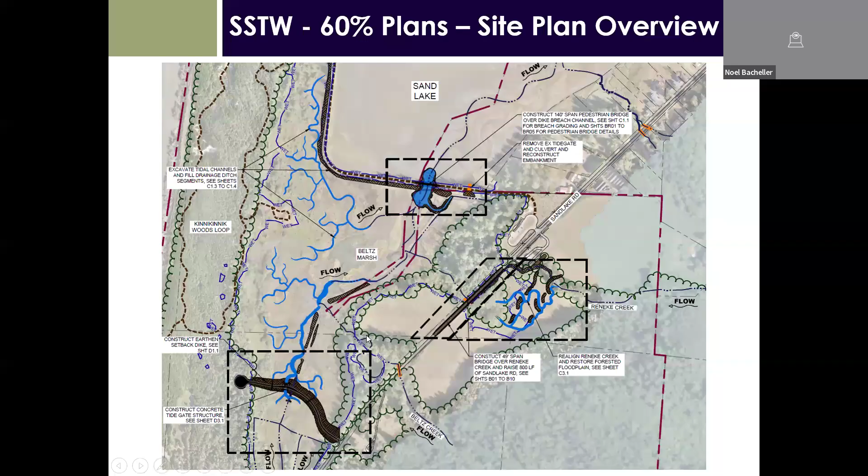Part of our plan and intent with this design, in where we've located the setback dike—let me just flip back to these slides—is that we've located the new setback dike so that it avoids that beaver dam. Right now that beaver dam has been there ever since I've been involved with the project, and it's persisted that whole time.

Basically what we're planning is that behind the beaver dam, conditions aren't really going to change because of the setback dike and the water level setting we're planning to use with the new tide gate structure. We're effectively giving the beavers that southern 10 acres to maintain as beaver pond and freshwater wetland.

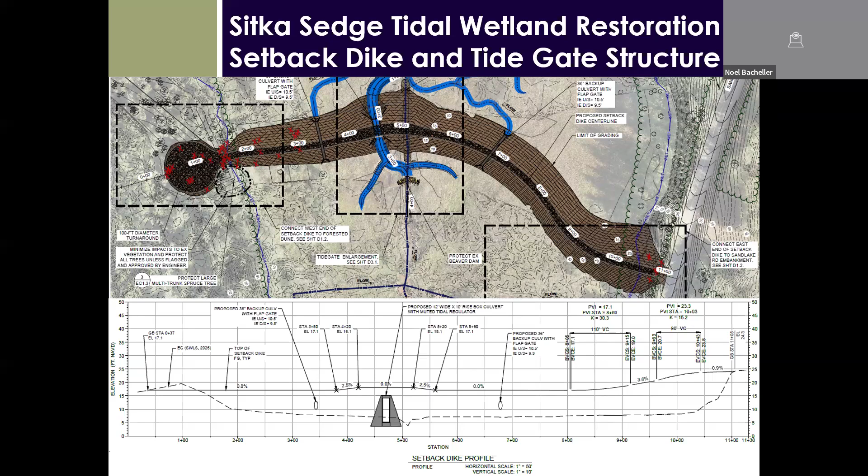There's a lot of research and evidence showing that beaver do exist and live in estuaries, in brackish water systems. Again, the area south of the setback dike will mostly remain as freshwater wetland, and beaver will continue to be able to build and maintain that dam. There's a beaver lodge present in the channels back there.

So I don't know if I directly answered the question of where they'll be building new dams, but again, we do expect beaver activity to continue at this particular structure, which would be sensitive to plugging. We're implementing measures to minimize and prevent that, and also providing good access around this structure. This view shows the access road on top is wider here, 24 feet, wide enough for an excavator to get in there and remove beaver debris if necessary.

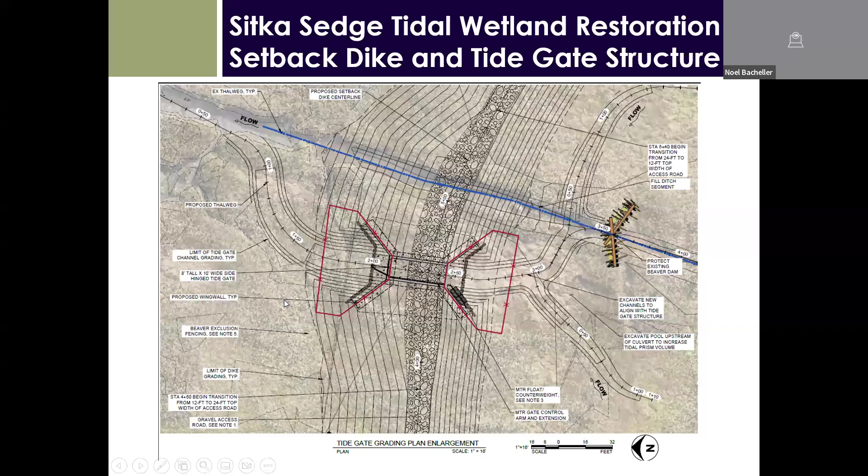Krista was able to get that funded at 2.5%. We did that for design, not for construction. We applied for federal highway bike and pedestrian passage money, which requires a 20% local match. So when you look at a $3 million plus project, it requires the county to kick in a non-federal match of 20%, so $600,000. So we pushed and said, let's double down on Reneke. Reneke is the primary, most important location for us from a road department point of view. Belts and No Name Bar, it would be nice to get those replaced, but from a structural point of view, they're not as critical as Reneke. Reneke is also unique in that it requires the entire ridge right above it to be realigned and get it out of the roadside ditch. So Reneke was, from the road department, the most important. It also has the most traffic. So yes, provide it.

And the roadway design there, as Chris mentioned, the bridge itself will be wider than the existing roadway, and the roadway design does implement shoulders, which there really aren't any of along the road, particularly in that location. So there will be some widening, but not for the entire length of the roadway.

Any other questions? Comments? You may have mentioned this already, but how tall will the new dike bank be estimated to be?